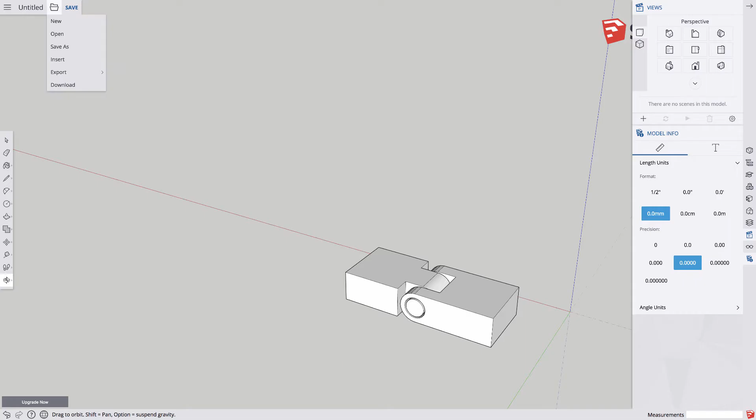The first thing we need to do is create a new SketchUp project, and we're going to make sure we choose millimeters. It's important to look at the model info on the right hand side of the screen and make sure we have high precision. If the precision's too low, it's going to be difficult to move our components around and make sure we have those nice gaps - they'll start to click into place. So we want to make sure that precision is set quite high.

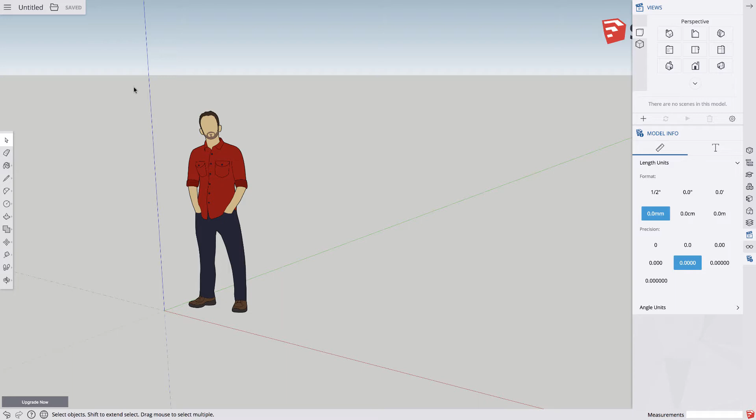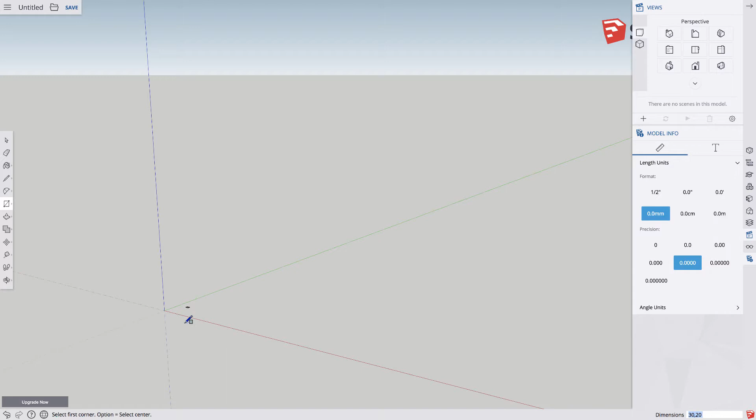Now, using our arrow tool, we can remove the placeholder character and start to build our piece. We're going to use our rectangle tool first, and change the size of this to be 30 by 20. You can see that's gone incredibly small, so we can just zoom into that using our mouse.

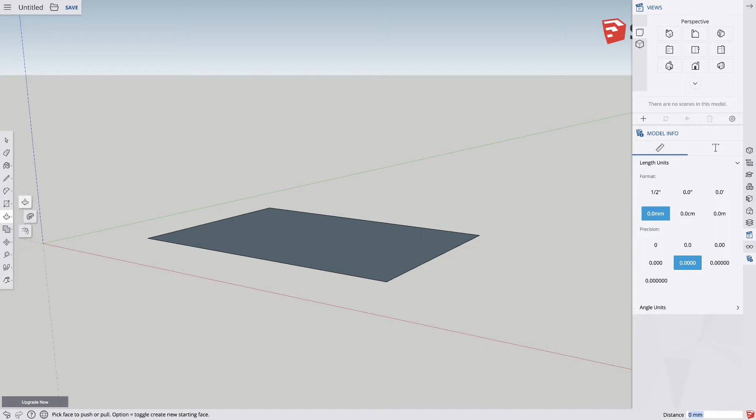I'm also going to use my move tool to make sure I move it back into our work area so I can see my axes, like this. So that's going to be the first side of our hinge. And using our push-pull tool, we can pull that 10 millimeters on the y-axis.

Now we're going to use our tape measure tool to put in some markers here. I'm going to orbit this around using O on my keyboard, or the orbit tool at the bottom of the tool panel if you prefer. Then I'm going to grab my tape measure, press T on the keyboard, and create some markers here. The first one I'm going to bring out is 11 millimeters.

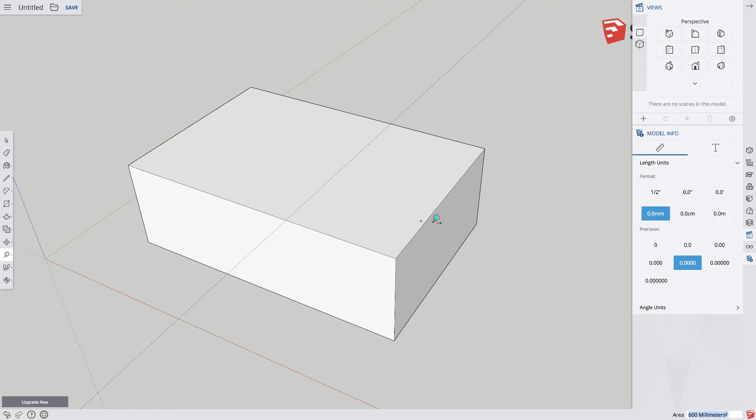Then I'm going to bring this one in 4.5 millimeters, and repeat that on the other side. I'm going to bring one in here, 5 millimeters, and one up, 5 millimeters, so that I have all these markers in place.

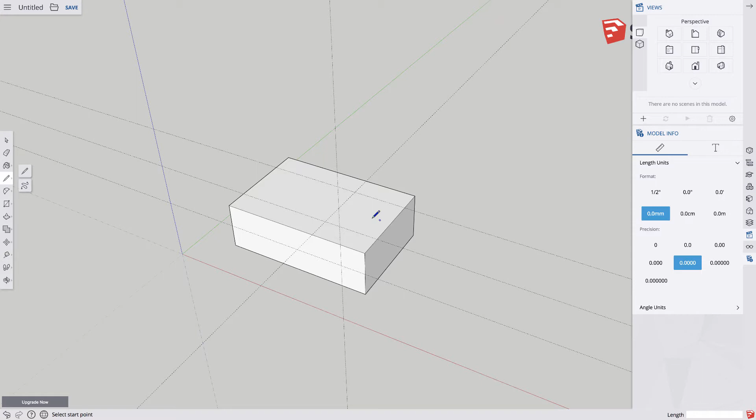Now basically what I'm going to do is draw out the first little area here. So I can click this with my pencil tool, and that is going to become the section of our hinge that we cut away. We can just use our push-pull tool to push it down until we get that on-face option. Then when I let go, it'll actually disappear.

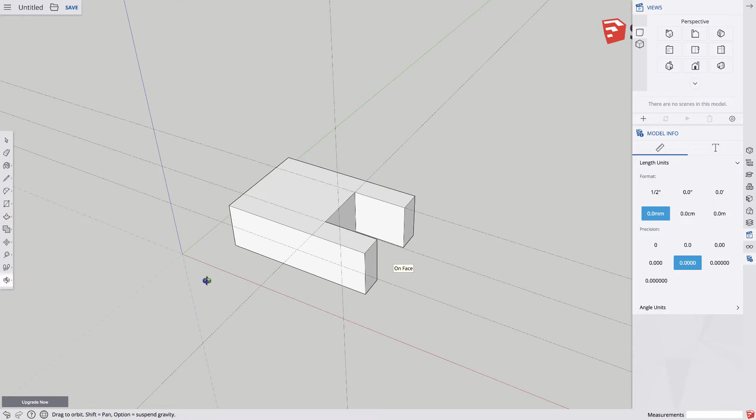Orbiting this around so I can see the side of my hinge, I'm going to use my circle tool to draw a circle of 3.5. Now this is going to become the area that disappears, that our hinge sort of locks into. But first I want to round out this edge.

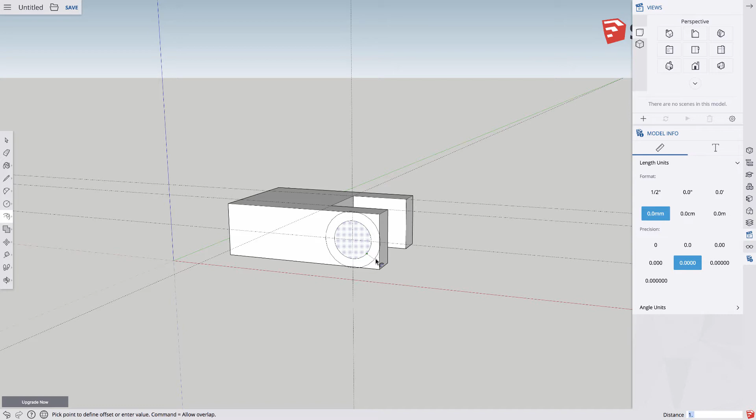So I'm just going to use my offset tool, and clicking on that edge, I'm going to drag it out 1.5, enter, which gives me this nice rounded area. And using my push-pull tool...

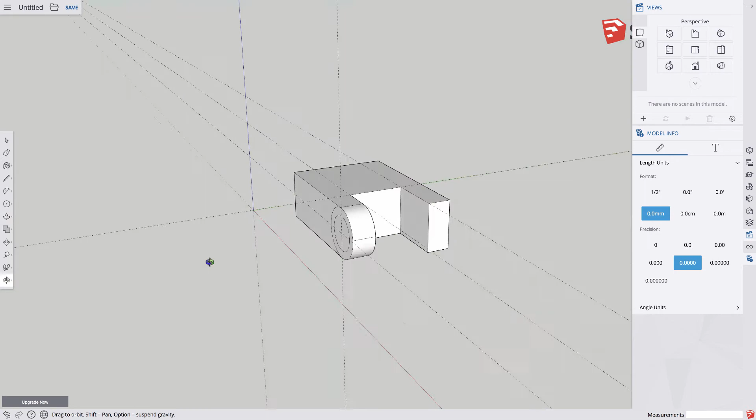I can just push that till we get a notification on face or offset, and that will remove that edge so we have this nice clean curve.

And I'm going to zoom into this middle section so I can see it, and using my push-pull tool, I'm going to push this area in again until we get that option on face, and that will make sure that disappears.

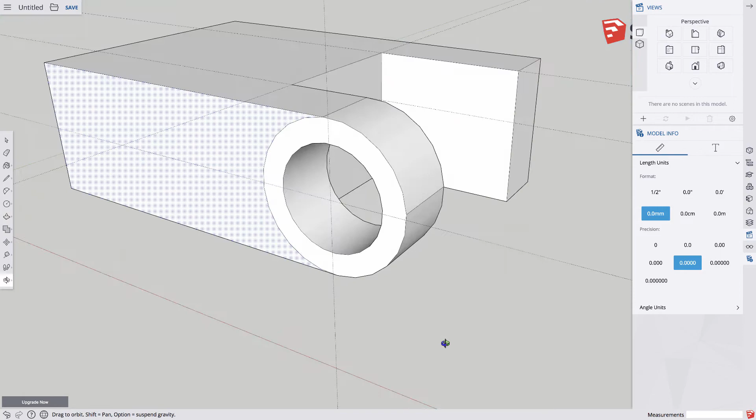All right, so I'm going to repeat this process on the other side of my hinge now. Using my T for tape measure, I can bring a point out 5 millimeters and bring a midpoint of 5 millimeters.

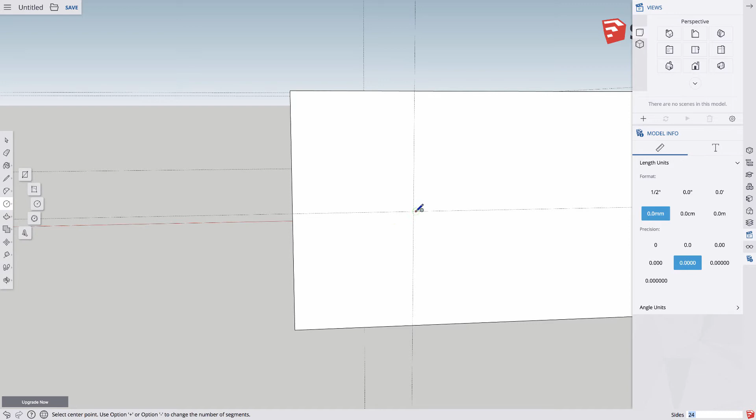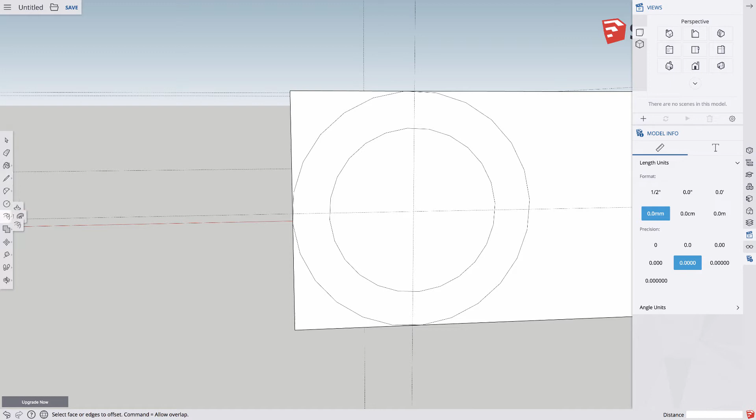Draw my circle of 3.5. I'm then going to create my offset from the line, 1.5. And then remove these edges and remove that internal area as well.

Okay, so there's the first part of our hinge. Using my eraser tool, I'm just going to remove all of these construction lines because they're a bit messy, and our hinge on the other side is going to have slightly different measurements, so we don't want to accidentally use the wrong measurements here. So we're going to remove all of that.

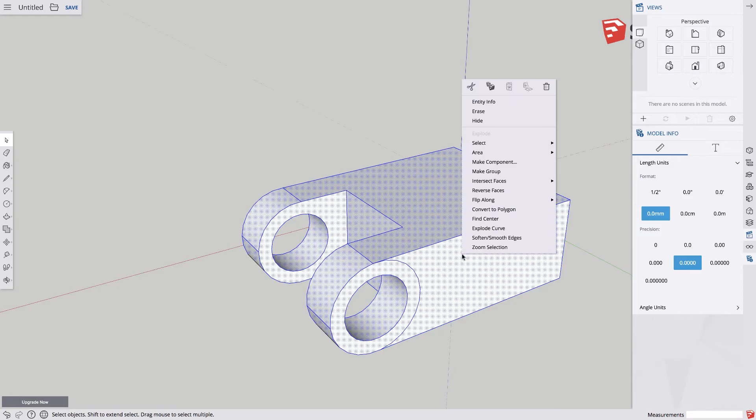I'm going to highlight the entire shape using my arrow tool, right click and choose Make Component. I'm just going to give this a name - Hinge 1. So this is the first part of my hinge, and that's going to tie that all together so I can move it as one piece later if I want to, and it doesn't get confused with the second part of my hinge.

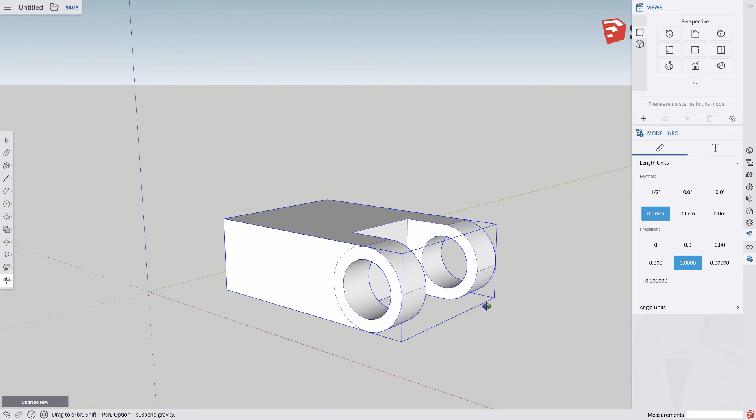So orbiting back around and zooming out a little, I'm going to start to create the second side of my hinge. Using my rectangle tool, I'm going to draw another box which is the same measurements.

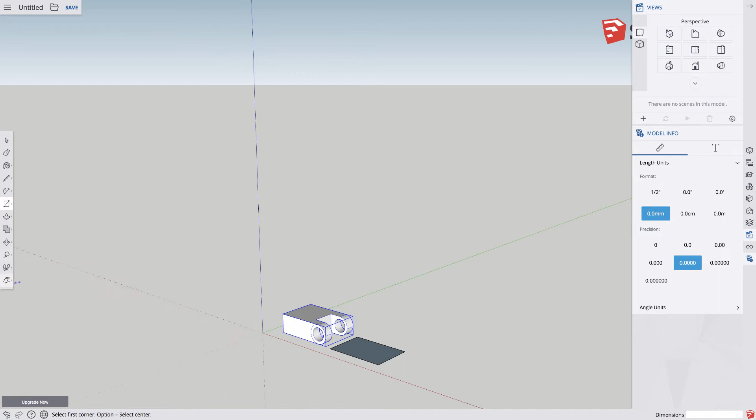So 30 by 20. And we're going to also bring that one up 10 millimeters. And get our tape measure tool so that we can start to measure this one out a little bit.

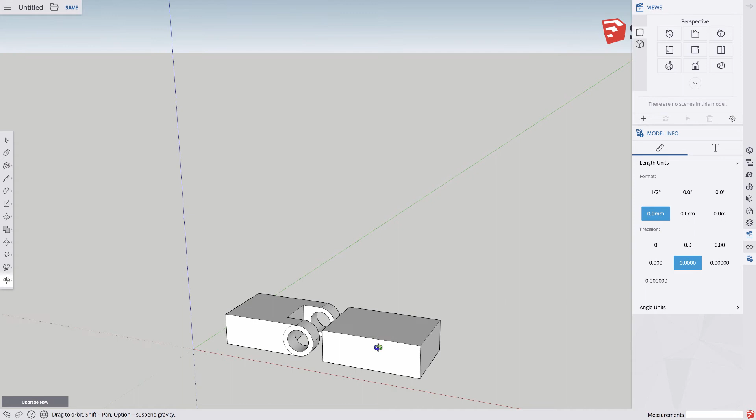Alright, so we brought our sides in 4.5 millimeters on this one. So we want this to be slightly wider so that it'll fit inside the other piece. So we're going to put tape measure marks at 5 millimeters here, starting at the side, we can drag this out 5 millimeters.

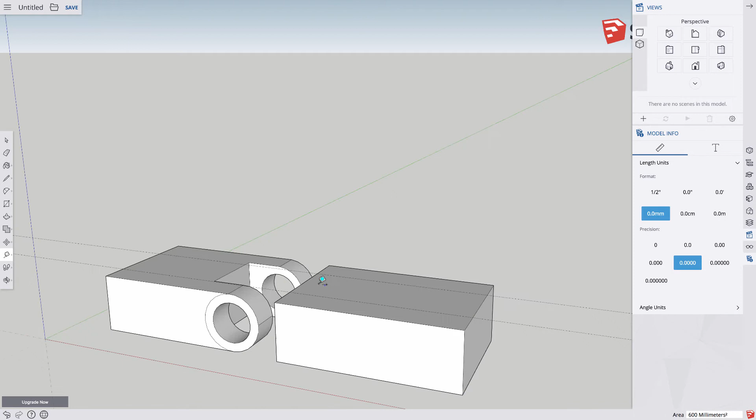Drag this one out 5 millimeters. Bring this one out 11. We can also bring this one up 5, and I'll bring this one across 5 so that we have our markers on the side ready to go as well.

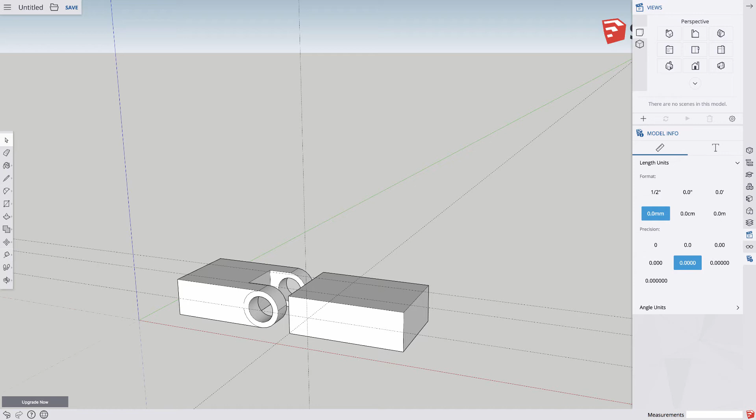So this time what we're going to do is actually use our line tool. I'm just going to rotate this around so I can see it, to draw in the outside edges. So I'm going to draw that corner, and I'm going to draw in that corner, and using my push-pull tool I can just push that down, and just push that one down until it disappears.

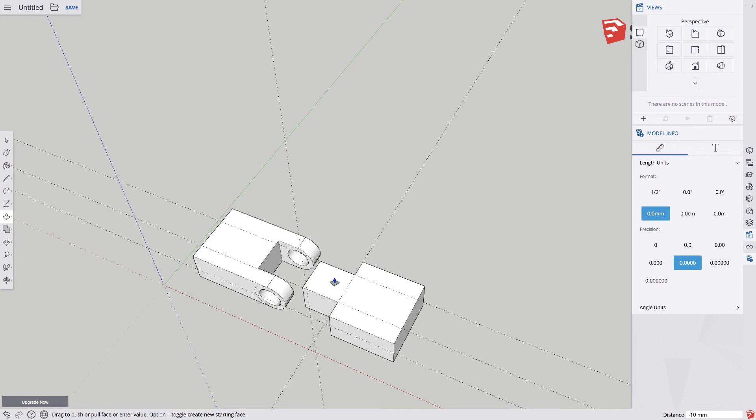Now sometimes it can be a little bit tricky to see whether it's actually worked, so it could be a good idea to actually just rotate around so you can see it, but that one has worked in this instance and that's disappeared. Okay, so coming around to our side point here,

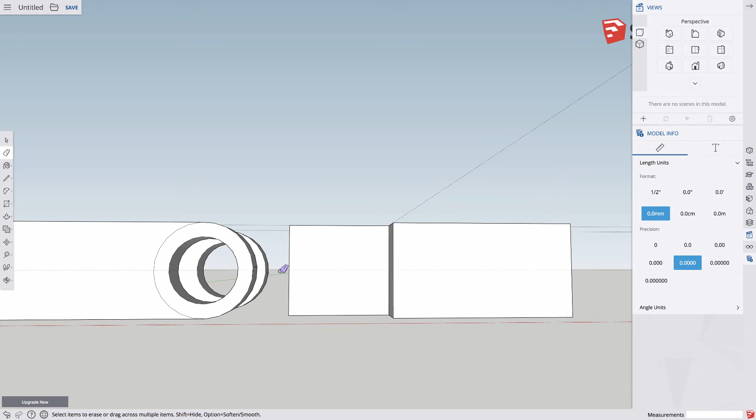Actually just going to get rid of these construction lines because they're not quite right, since we've removed the edges, and we'll do new construction lines. This time I'm going to come down 5 and across 5, just so that they're on the actual face so we can make sure that they are accurate.

And then I'm going to grab my circle tool and I'm going to bring that out 3 millimeters. So this was 3.5 and we want to make sure that there's a small gap in between this and this, so we'll bring it out 3.

We also want to round the edges off here as well, so I'm just going to get my 2-point arc, and you can see when I click here it brings out a tangent to edge. I click to close that and click again to make the line, and that's going to give me a perfect copy of the circle in the center.

So we click again here, bring it out slowly, tangent to edge, click to make the line. So there's a double click there. Now it's important to note whether they actually matched up. So you can see here that they're not quite even.

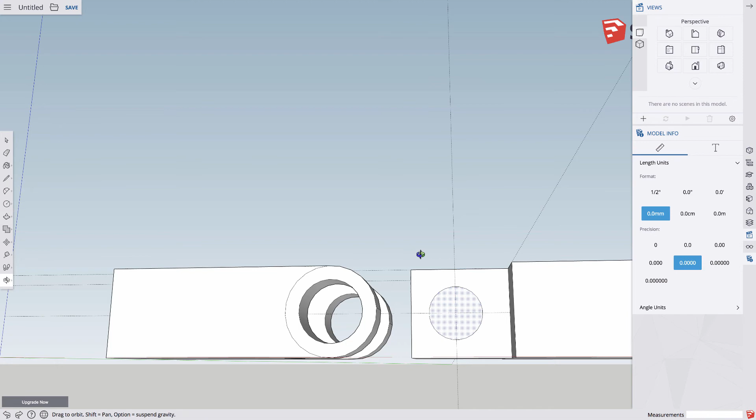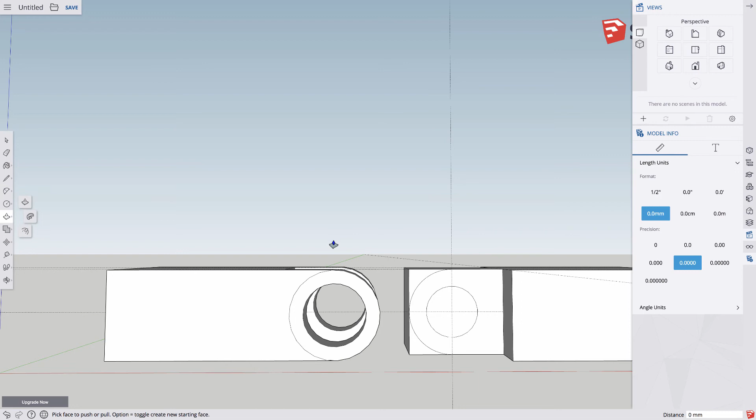So when I try to do my push-pull tool, I get this error where it doesn't work. So using our handy Control Z, I'll try that again. So I'm going to use my 2-point arc tool, click on the line, click tangent to edge, and then we'll try it again, click. And now that should have closed that little gap so that I can get rid of that area.

Okay, so this time in the middle, I actually want to pull this out 5 millimeters. So now you can see that we have this nice little area that can fit inside and create our hinge.

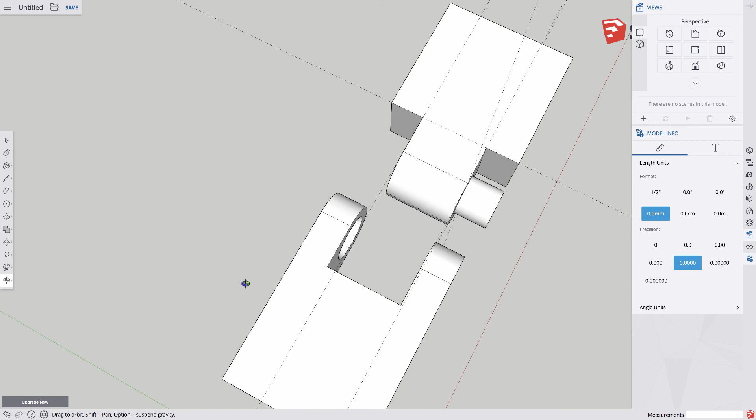So spinning round, we'll do the same on the opposite side with our tape measure. We're going to bring out 5 and down 5. Oops.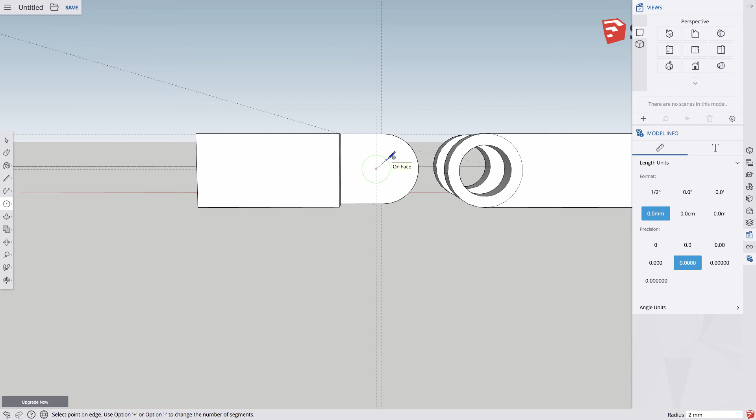And create a circle of 2 millimeters on that face. Then using our push-pull tool, we can pull this one out 5 millimeters. Okay, so we can see that that's done a great job of creating this little area.

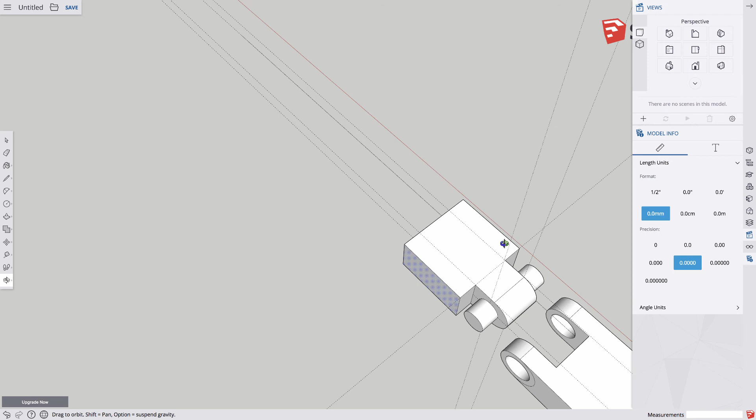So the last thing we're going to do is go back to our side view. We're going to highlight that whole area, right click it and choose Make Component. So this is our Hinge 2.

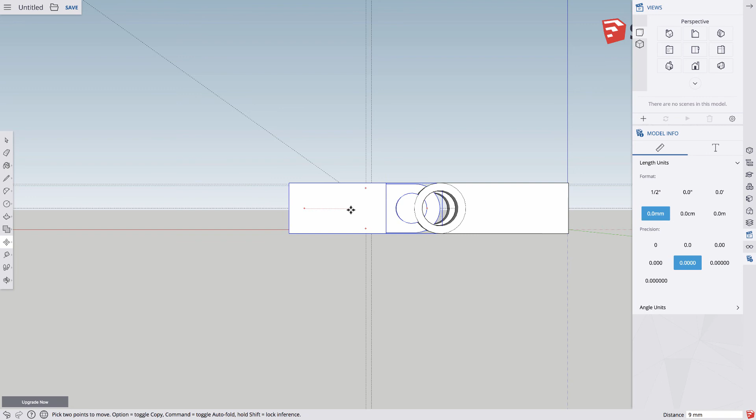So yeah, using our Move tool, we're just going to take Hinge 2 and drag it along the x-axis until it's just inside that other component. Going to bring this back so I can see it. And closely. Oops. And our move tool.

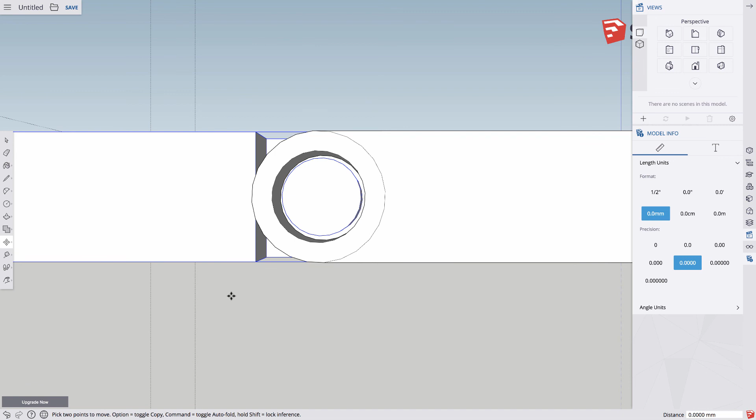And you can see there that even with that precision selected with 4 decimals, seems to be kind of locking into place a little. There we go, so we can just make sure that this component is nicely centered inside the other component. Just double check it from the top here, so we don't want them touching at all.

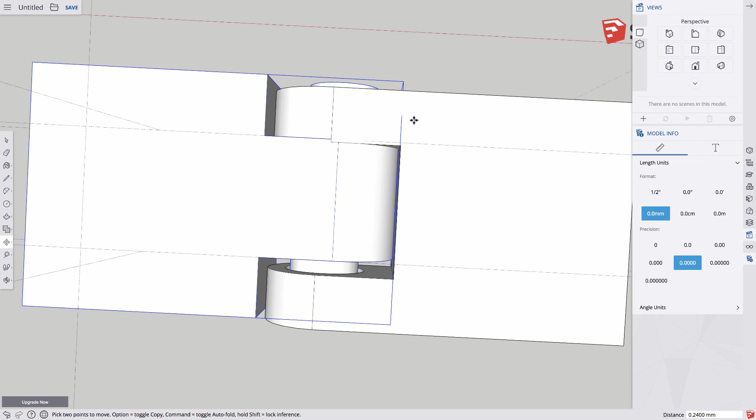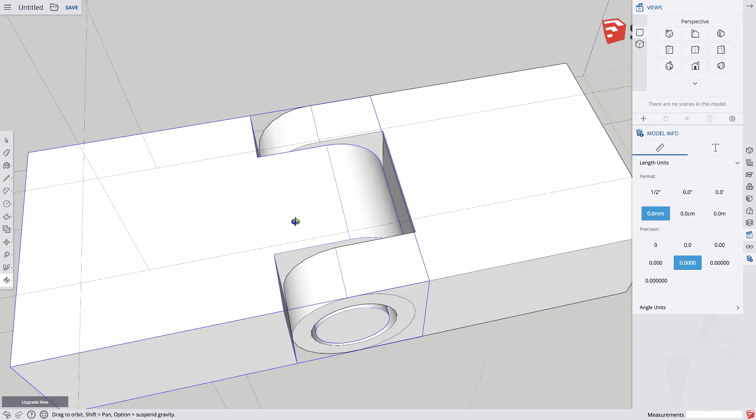So now if we come back this way, we can, there we go. So we can see now that there's nice gaps all the way around it. And this will now print.

So we can now go up to their little file and choose Save As and save it as a name, or we can choose to export it as an STL file ready for print.